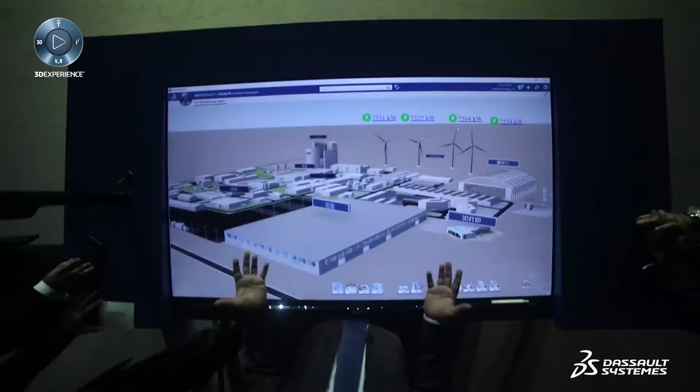So as always, with visiting a workshop, I suggest we take a little tour of the operation here. Okay, so here is the warehouse. This is where the inbound logistics is coming in. From here, the flow of materials goes to the fabrication here for mostly machining and milling.

But also in fabrication, you see that that site just got equipped with a 3D printing facility to put some agility in the system. So the part from the warehouse goes to those two fabrication areas, and then the flow of materials goes here, which is painting or surface preparation, in order to get the materials prepared for final assembly. The final assembly will happen here.

This is an excavator factory - the big assembly hall where the excavators will actually be assembled. When assembled, all excavators will go into that big hall over there, the demo hall, where customer acceptance will be performed for those small series which require it, or when the customer wants to see it, and in any case it will go there for preparation to transport.

You see, this is a sustainable site, and so this site has wind turbines which produce electricity for the sites, and indeed this is very good from a sustainable point of view.

And finally, have a look at here. This is the engineering and management building, and in here is kind of the nervous center of that site where a lot of decisions are taken.

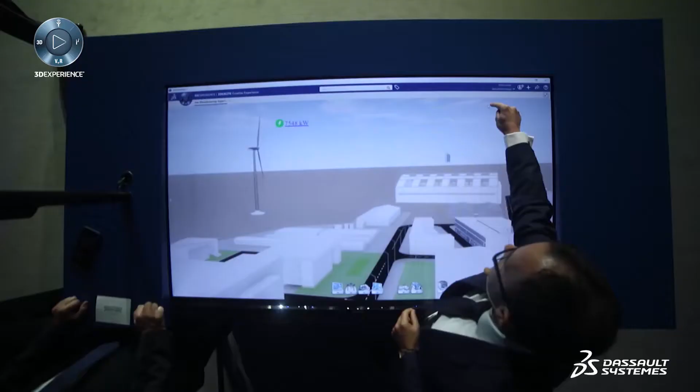Indeed, you're talking about performance. Performance requires availability of every system. If you want availability of every system, you need to control what's happening in real time. Here, more specifically, we are controlling the real-time data of our wind turbine, and you just saw that one has changed status. So of course I can go and see - we see connectors to the OSIsoft data, the real-time data. However, this is very, very far from being enough.

Because in reality, if you take the IoT data alone, there's not much you can do, there's not much insight you can get. So at Dassault Systèmes, we believe, and we have the very strong belief, that IoT is a must, but under two conditions.

Condition number one is we're using what we're learning on the virtual world to better interpret the IoT feeds. So there is no other way to get insight than to be capable of understanding how the system is behaving against the way it should have been behaving. This is how you get insights, this is how you identify weak signals.

The second condition is that you actually project as well in the virtual world the whole of the context - what was the maintenance operation, what is the spares which are applicable, what is the nominal purpose for this specific system. So if you have both the context and if you learn from the virtual world, then IoT becomes of great value.

I really think you have a point here. I think one of the big differentiators of our approach is indeed the fact of being able to look at data in context. But I think this needs a little bit of deepening.

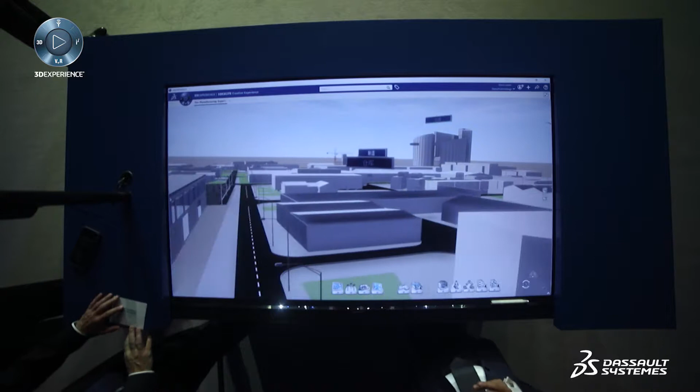Yeah, I can give you more insight on what I mean by context, and I realize I've been using the word a lot, and I'll continue to do that. But this is easy for me in your specific context, Guillaume - you have spent far too much time yourself in the factory to accept that people on the shop floor would agree to work just on a dashboard. Because if you want to give them context, you need to give them more context.

So what you see now is a virtual representation of our factory with all of the real-time data fully projected here. You have all of the performance KPIs, you have all of the issues, you have all of the behavior. Everything is accessible from the virtual world. The good news is here you have all of the context.

There is no more need to provide everyone with the name of the robot to make sure you speak about the same machine. It's obvious, it's in front of your eyes. And by the way, there's an interesting side effect to that. Because this is model-based, and on top of our data science engine we have modeling and simulation, we can play what-if scenarios to make sure we're configuring the system to behave the way we want and to model our future.

To the point. So if I understand well, here I'm going to manage my own data, right? So I'm going to be the king in my own castle within the four walls of my factory. But as industrial, we all know that this is not quite sufficient. We need to get open to the outside, and we need to get that data flowing in. How do we do that?

I hope that I have not been misleading so far. It is true that in the last few minutes, I have mostly been showing you data that are coming from within the factory. But you're right. Smart manufacturing starts outside of the factory, and more specifically, starts by capturing the data generated by the customers themselves.

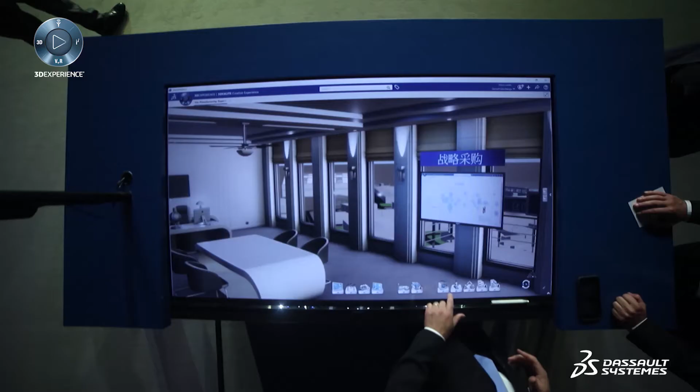Well, to do that, we're going to combine the creative theme and the human theme. And let's go right into the 3D printing factory and take a look at that in action, where we're going to talk about driving very good and efficient execution right on the shop floor by not only triggering the execution, but monitoring the result and then optimizing the operation based on real-time information.

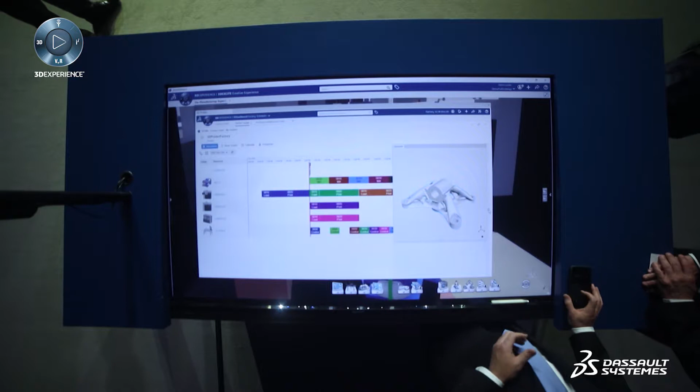So here, this is the factory cockpit that we're accessing through the 3DEXPERIENCE platform. And this is showing us our 3D printer factory and all of the equipment that's currently in operation. We can see the schedule of work orders happening, and you can see there's three similar work orders on this particular part that's being batched right now. More than just seeing the schedule, we can get the real-time information coming from the equipment. We can see that on one printer, the job is now complete.

And in fact, it's in quality control to check the result. And again, because this is real time, as the quality control is happening, we now see it's changed its status and it's now in KO. It's no longer good. And because this is all digitally connected, we can go into that information and dig in to find out what's going on and see, can we resolve this right now on the fly?

And thanks to the power of 3D to help us communicate, we can see the quality control person has gone in and indicated there is a problem on the top surface. We can see the notes that they've put in. We can look at maybe pictures they've taken. And clearly, this is a problem that we need to resolve.

So we can send out a non-conformance notification, pause all the other similar jobs until we can resolve this, and now go about working on the resolution. In this case, we need to do a milling operation to smooth out that surface, and we can go and schedule that in the work order. And now we can ask manufacturing engineering to go in and create that machining program for the mill.

And because this is 3DEXPERIENCE platform, we can do this no problem. We can leverage the real 3D geometry, the master geometry. We can set up the tooling and set up the equipment, and then go in and program virtually and validate that actual tooling that we want to do.

And all this information can then be connected back into the 3D printing factory. It can be scheduled into rework to fix that non-conforming part. And once that's been validated, we can update the other work orders with this process so that now everything can be rescheduled real-time dynamically like this.

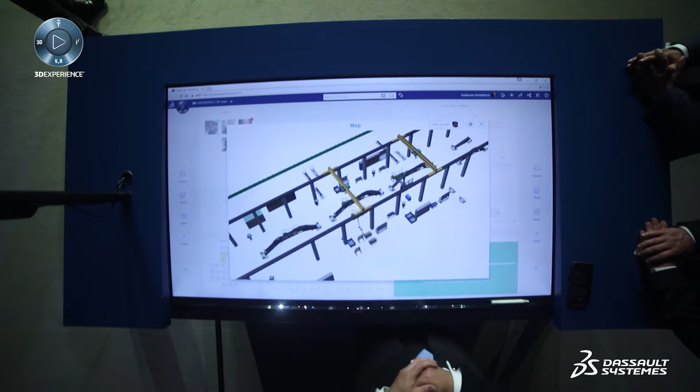Now we want to go in and assign people to where they might be working for the day. So I can put Morgan over here, I can put Rob here. Hey, I'm not here, I'll put myself here. You're not here, I can't put you here.

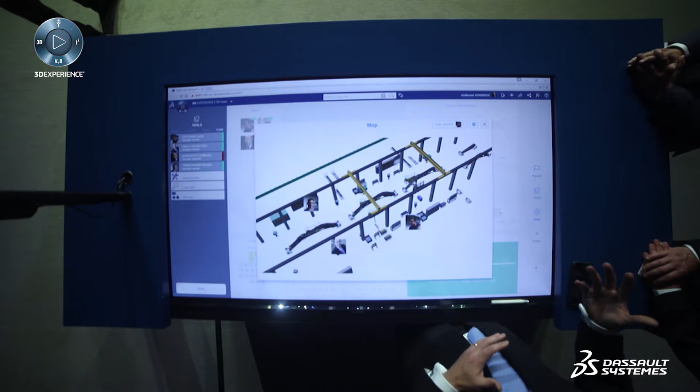Imagine, again, the platform intelligence being able to not only position us here, but go and check our certifications, check that they're up to date, check that we have the skills and competence to do the work that's being asked of us.

Also part of our 5-minute meeting, we want to take a look at what our health and safety was yesterday. And yesterday we did have a deviation, so we can report that.

But the system is saying, wait a second, you had a deviation, you need to take an action. It's not acceptable to leave this deviation here. So we'll take a note and have a follow-up action on that.

And finally, in the team we're looking at our work orders from yesterday, and we can indicate that for this metric. And if we see there's an ongoing problem, again we can take an action to follow that up.

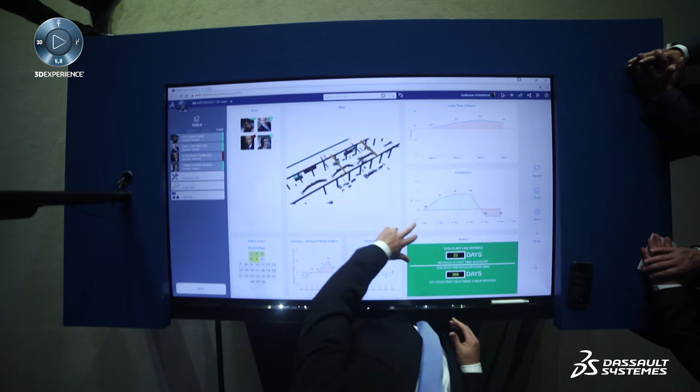Now all of this interaction we've been doing in our 5-minute meeting is being tracked and available. We can go back and see what we have done in previous days, and we can close out some of the tasks that are done.

This new task in here that we want to work on today, Morgan, I'll have you look into that and we'll see what's going on. So thanks to all of these capabilities, we're helping everyone in the factory, the workers, the team leads, the supervisors, providing amazing visibility and traceability to virtually manage everyone and have a very efficient shop floor operation.

Okay, this is one instance of lean manufacturing, this is a 5-minute meeting. I guess we can do other instances of lean manufacturing, right?

Of course. We can imagine a scenario here where we want to do some collaborative problem solving, maybe with a fishbone type of approach. We want to work collaboratively, do some brainstorming, and again take some ideas, create some assignments and actions and follow-up.

And because of digital continuity and this interface that's easy to collaborate, this is all inside the 3DEXPERIENCE platform. So there are tasks and actions to follow up by people once we leave this room and go on to our day.

So it's not only that the 3DEXPERIENCE will help us drive our operation on a daily basis, but on top of that, it will certainly help every one of us on shop floors to manage our teams, and for people on the shop floor to execute efficiently what they have to do. Smart decision making, management of value, providing efficient execution.

One last topic, okay? How is 3DEXPERIENCE Twin helping us innovate? This is an important topic.

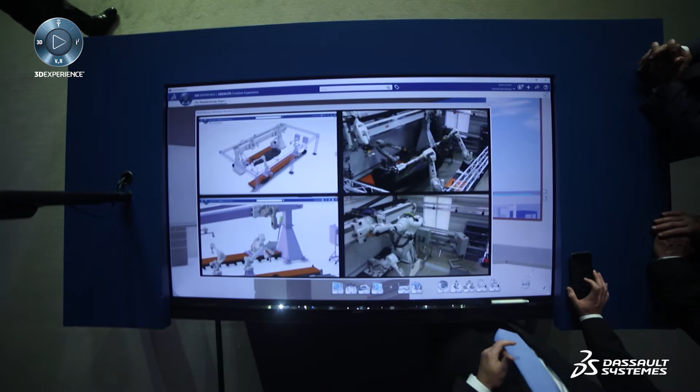So here, what you will see is some work being done, investigation to explore a new flexible MRAM cell. An MRAM is a multiple robotic advanced manufacturing cell. And with some collaboration we've been doing with Wichita State University in the United States and the National Institute for Aviation Research, we're working to develop the manufacturing cells of the future.

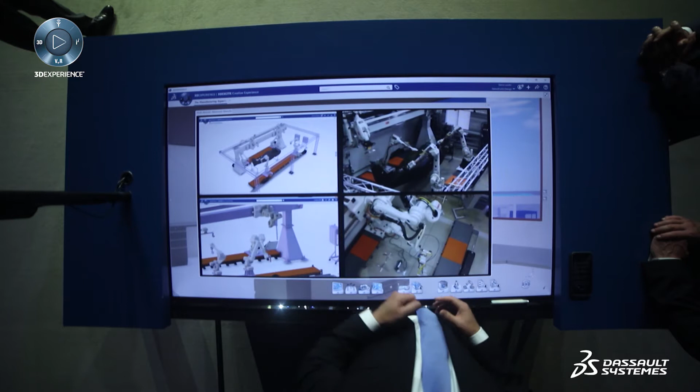And using the 3D Experience platform, we're able to integrate and program virtually these manufacturing MRAM cells with multiple manufacturing technologies and incredible flexibility, so that one day, in the above example, you are able to do some manufacturing on a composite fuselage, and the very next day, reconfiguring that so you can do some manufacturing, say, for a wing on a drone aircraft.

And this is the kind of thing that at Dassault Systèmes we are very, very excited to do by working with Wichita State University to train the next generation of engineers using real industrial projects like this, so that they can build the factories of the future. Okay, so this is really about R&D, about investigation of new technology to see how that can help in building the factory of the future, or the future of industry.

But in a lot of cases, innovation is not that shiny side of the problem. It's the other one, the one that takes an innovation and tries to push it through the shop floor efficiently. Can the 3DEXPERIENCE Twin help us doing that? This is the second part of the question about execution.

And let's go back in the boardroom to do that, because a lot of times there are some decisions made in the boardroom that then need to be pushed to the enterprise. So here we have everything at our disposal to do that. We've got our current excavator product that's in a max configuration. We can see that there's multiple options, a couple of different bucket sizes that our customers can choose from.

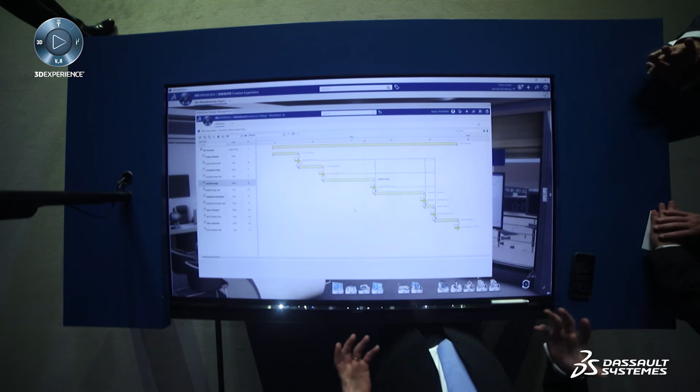And we can also see that the team has been exploring some new ideas that they're looking at to make a better experience for our customers, to drive into some new markets. And one of the ideas that's coming out is an entirely new attachment to give a new usage of the product. So because we want to be flexible and take advantage, we have access to the digital project plan. We can see that it's still in design, so there might be a chance to actually get this to market quickly.

And to do that, we simply take the task that's available, drop it to in-work, and that will assign a task to engineering to go and do an exploration on this. So because we have access to all this relevant information, we can make the right decisions, set up a plan for success, and put that plan in motion.

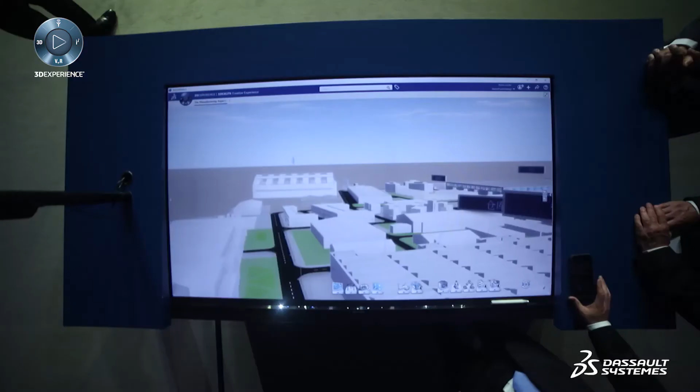Okay, this is on the engineering side, right? So what's happening on the manufacturing? So the manufacturing side, let's go now back to the manufacturing office, where we can see the consequences of that action coming out from the boardroom that went to engineering. Engineering did a bit of a study, and now in manufacturing, we have to see what to do and deal with that.

So here we can see that engineering has updated the model. They've added the attachment. And now on the manufacturing side, it's our job to take the process planning and incorporate that new option into our flexible manufacturing.

So because this is all digitally connected on the platform, we can take the engineering data. We can now navigate and find the corresponding manufacturing information, connect that with the manufacturing process plan that we need to revise to incorporate this new option, set that in as a task to be worked on, and now the manufacturing engineer can do their work to upgrade that process plan. So all this, as you can see, is very simple, very quick, completely digitally connected in real time.

And this is how, with everything we've just shown, the 3DEXPERIENCE platform and the 3DEXPERIENCE Twin are helping to improve productivity and agility for very efficient execution on the shop floor, which is the human theme, and also unleashing extreme creativity and innovation in manufacturing, which is the creative piece.

Thank you very much. So I think, I hope at least you got the picture. The 3DEXPERIENCE Twin will help us make smart decision making. It will help us manage the value. It will help us execute efficiently on our shop floors all those operations that we need to perform. And finally, it will unleash our creativity.